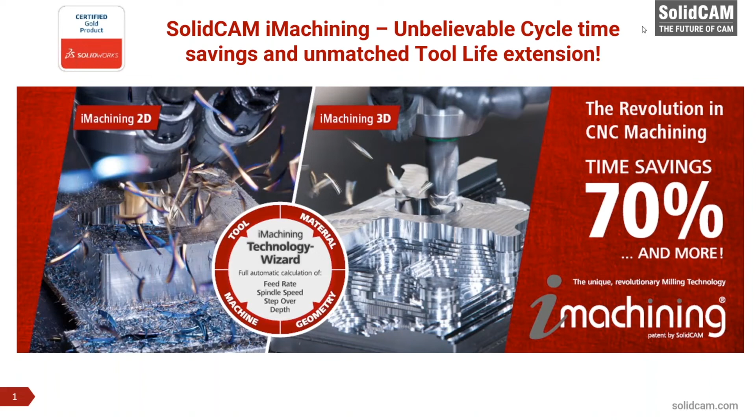I think most of the attendees here are resellers, and I think there are a few customers in here as well. So my goal here is to excite everybody about iMachining, and as Emil said, to show why every SolidCAM customer must be using iMachining. And realistically, every single machine shop should be using iMachining, hands down.

It is by far the single best technological advancement in machining that has existed. And it is the software that will allow you to make more money and cut your parts faster. Outside of buying faster machines, which is huge capital investments, or just adding multiple machines, iMachining is here to save money. It is essentially like adding more CNCs in your machine shop. So, all right, I'm gonna get started and we'll go from there.

So, SolidCAM iMachining, as Emil and I said, it is the revolution in CNC machining, and all of our customers are seeing time savings of 70% or more. And realistically, as you're going to see, this is not just for steel and things like that. Aluminum, it is all of our customers that see these benefits.

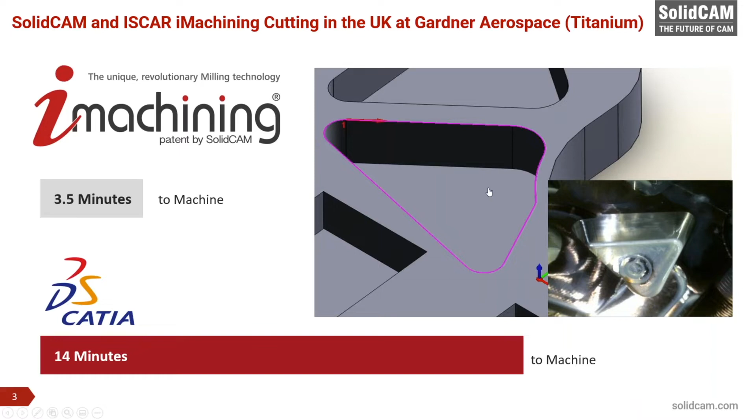Here's some savings in an aluminum part. So this was a customer who produces electronic components. Most aluminum parts are machined out of billet. So this is not a giant part, standard size part. We see it's got like an 8-inch vise in it. They had 400 pieces to produce. The standard cutting time before iMachining was 17 minutes, and the iMachining cutting time afterwards was 6 minutes. So this is a 65% savings.

And this in the end is what really speaks the most. Cutting 400 pieces saved 73 hours on the machine. As I said, we've all been there in machine shops where you need to get the parts cut. iMachining is like having multiple machines cutting the same part, but you get to do it with your machine, and it's just a technology module.

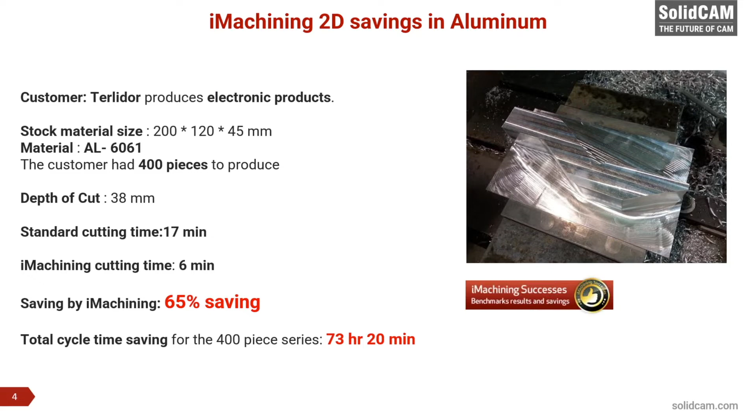Here's another aluminum part. And here, this customer in Germany uses iMachining 2D and 3D. As you see, it's mostly what I would call a prismatic part. There's no really contoured surfaces, but they use a combination of 2D and 3D iMachining. And on all of their parts, they see 65 to 75% savings. So you can see the part down here, you can see the part up here.

So even customers that are machining in aluminum, and I come from an aluminum background myself in aerospace, most people in aluminum think, I cut crazy fast already. I push my machine to the max. I have specific aluminum insert mills and things like that.

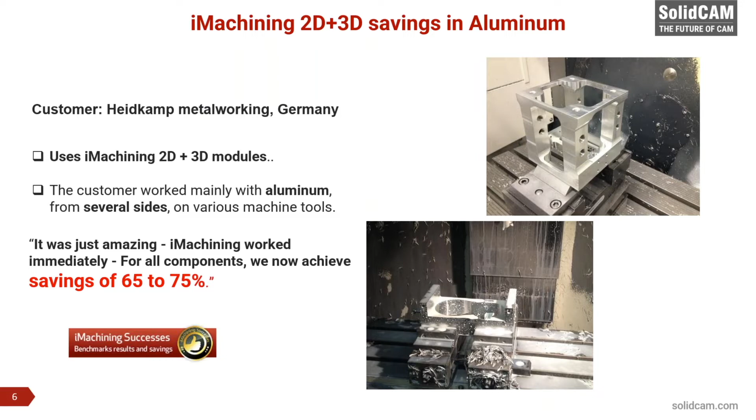Another major aspect of iMachining is reduced wear on the machine. I would say for aluminum customers, this is a pretty big thing, because most aluminum machining is done at high RPMs, and I think a lot of customers are buying high RPM, high dynamic machines because most customers in aluminum feel like they are hitting the limits of their machine all the time. They're generally running the maximum RPM. They feel like they are typing in the maximum feed rates that they can run.

So a lot of aluminum customers buy higher end machines, and higher end machines cost more money, and eventually spindles and stuff do wear out. We've had two machine builders, Hermle and Makino, both test iMachining against other high-speed machining softwares, and they both have concluded that the cutting forces acting on the spindle are the least with iMachining. So this is important, because in the end, spindles cost money.

So if you're a customer that's running your spindles around the clock on aluminum parts, or any other parts, but aluminum is definitely where people are maxing out their spindles on almost every single tool, by lowering the cutting forces and the spiking of loads on the spindle at high RPMs with these 24,000 and above spindles, you will gain more spindle life. And spindles aren't cheap in these machines.

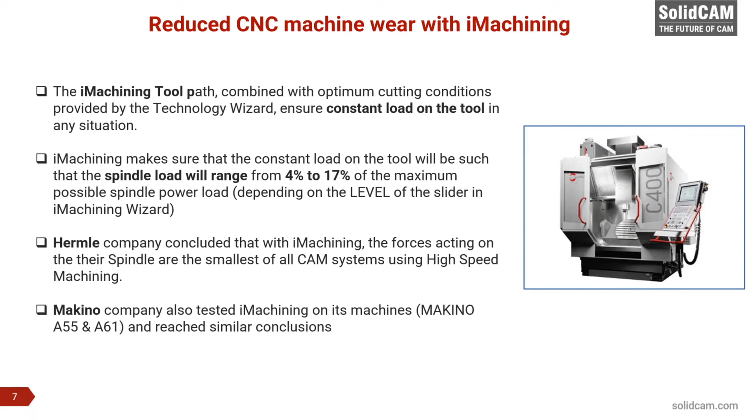So I have an iMachining cutting video here, and I'm going to try something I've not done before, which is sharing a video through GoToWebinar. So I'm going to switch over to that video. Let's see how this works. It's launching up. Now my screen sharing should have stopped, and you should see a new window popped up with a video playing. If you like, you can expand this window. I'm just going to play this video. It's just a 1-minute video that kind of shows what the

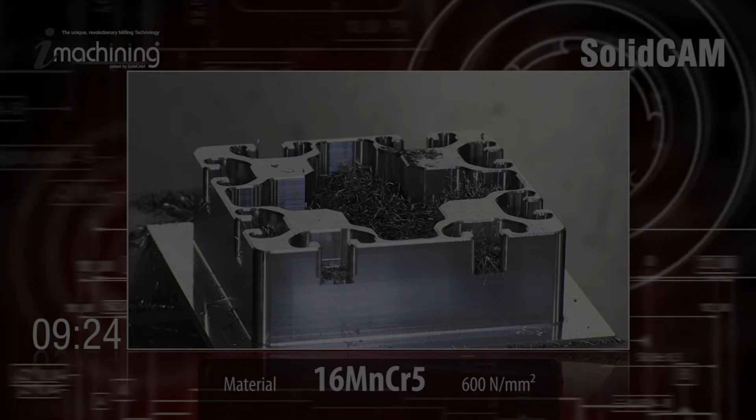Okay, Anthony, go ahead. It's finished. I'm sorry, everybody. Sydney just texted me and let me know that when I switched over to the video, it muted. So hold on 1 second. No, we heard everything, Anthony. Okay, good.

So what did we see in the video? The main thing we wanted to show here was that in iMachining, we do full depth of cuts using almost the full flute length of the tool, and we do high speed machining. As you saw with steel there, we were running, I believe, 14,000 or 16,000 RPMs.

In traditional machining, we generally do shallow depth of cuts and lower surface footages. As I said, in aluminum, most people are running the machines at their limits, but in steel, generally you're going to see people running lower surface footages and lower RPMs. With iMachining, we run higher RPMs and higher depth of cuts.

So to understand how iMachining achieves this, I'm going to talk about what actually happens in the cutting, because this is the portion where I think a lot of customers and all of us machinists, we've all seen videos throughout the past 15, 20 years.

You see these, oh, we have these fantastic material removal rates. You see this specific example of a cut, and the end result is they are able to achieve that on a very specific part and a specific machine, but you do not get that on your part, on your machines. And with iMachining, we give you that cutting, every part on your machines, and this is how we do it.

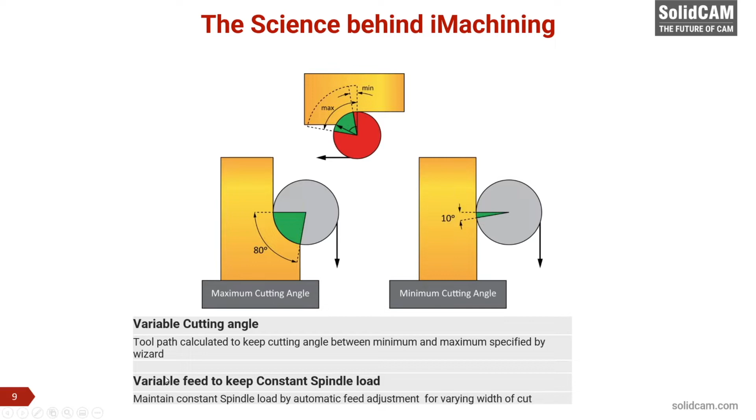So there are two main things here with the iMachining toolpath. We work with a variable cutting angle, which ranges between 80 degrees and 10 degrees. And then we also vary the feed to keep a constant spindle load. And I'm going to get more into that. As you can see here in this example, when the tool engagement is less, where the cutting angle is smaller, we are increasing the feed rate in comparison to when the step over or the engagement of the tool is the max.

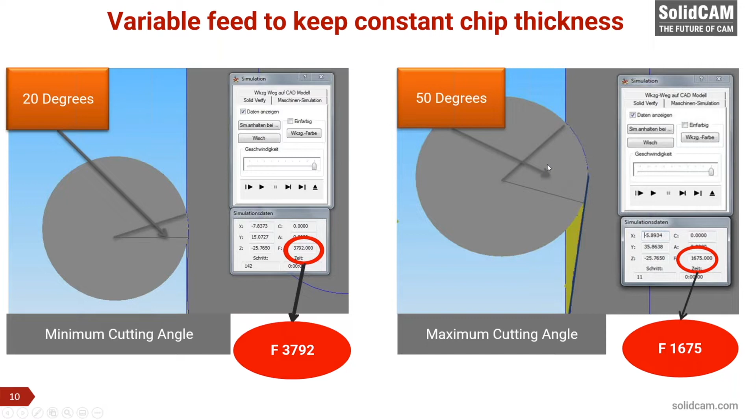Now I have a pretty cool video here that's called plastic deformation and shearing. And once again, I'm going to switch over to, oh, nope, never mind. Sorry, hold on, okay.

Okay, so here I'm sharing this directly through my screen because I want to be able to pause and forward this. So what we are looking at here is, this is not a helical end mill. This is just kind of like a turning insert. So this is the zoomed in video on what is actually happening when material is being cut from a tool. And I'm going to hit play now. And what you're going to see

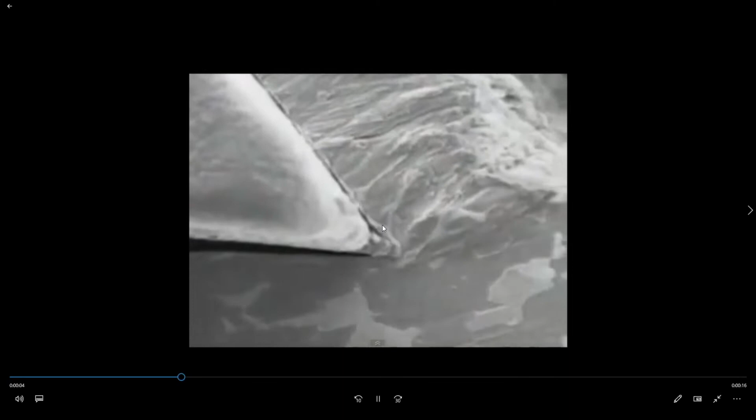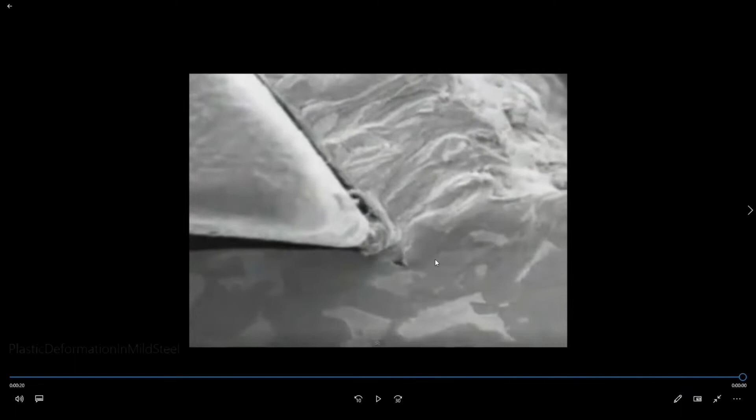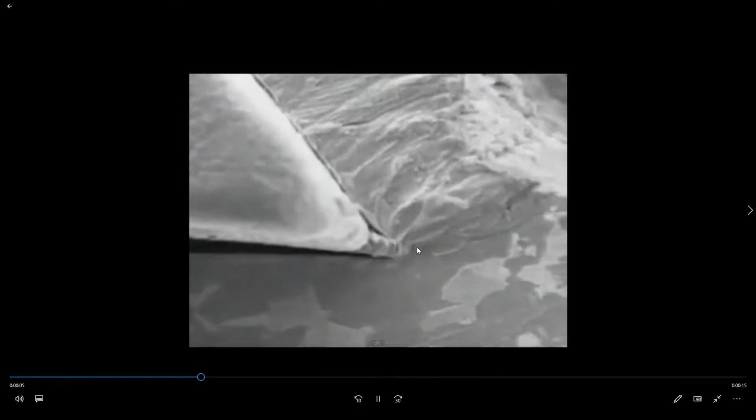is what actually happens is two things. There's something called plastic deformation, which happens around the tip. So this is where the tip of the tool is meeting the material. And you can see that the metal is actually like plasticized. It's going from being solid to shearing off. And then I'm gonna press play again. And what you see is that you get this shearing effect, and the material is sliding up along the insert of the tool.

Now, what I find incredibly interesting about this process is, I'm going to pause it right here. You will see that because you're getting this plastic deformation around the tip here, the goal is that all of the material would perfectly be coming up and away from the tool. But what you do see here is sometimes the material is actually falling underneath of the tool, and then it's rubbing along the backside of the insert.

So what's important here is, and I think everybody has heard this in the machine shop, is getting the tool underneath the material. So when you take a cut, you can't take so soft of a cut that the tool is not able to get underneath of the material and actually shear this. So in aluminum and softer materials, it's obviously less of a problem, right? So the softer the material, the easier it is for the material to plasticize and then shear away. The harder the material, the tougher this gets.

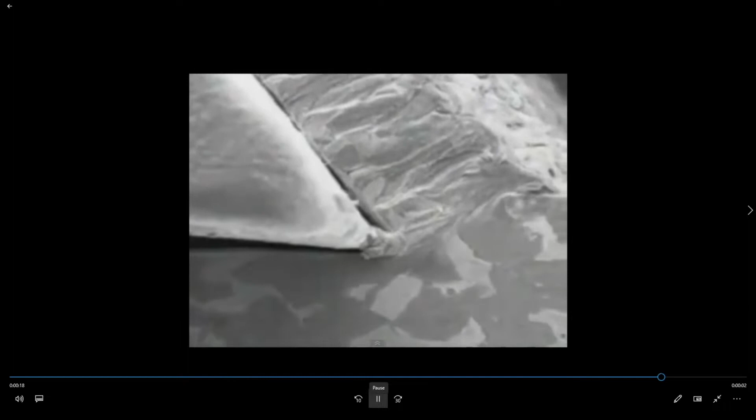Now this actually makes kind of a catch-22 with traditional tool paths, because you need to be cutting fast enough and with a heavy enough cut that the tool is actually getting under the material. But if you cut too much with the hard material, then you're actually going to end up in a situation where you're breaking the tool. So I will switch out of this and go back to the presentation.

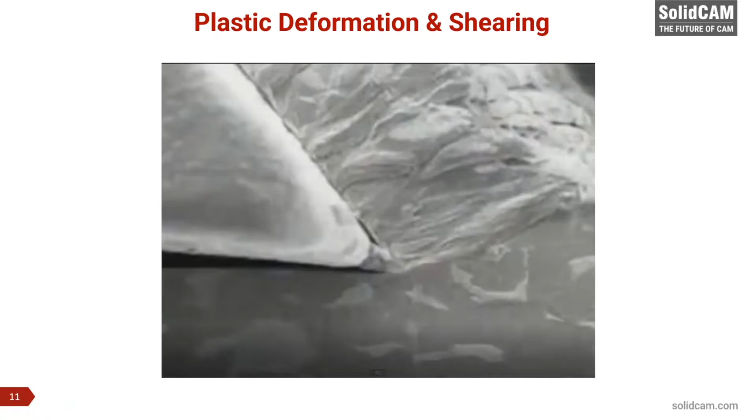Okay, now I have one other animation. Now this is actually going to be an animation of an end mill rotating and cutting. And this goes back to getting the tool underneath of the cut, getting the tool to actually take enough material that the tool is actually going to be able to shear it away without pushing.

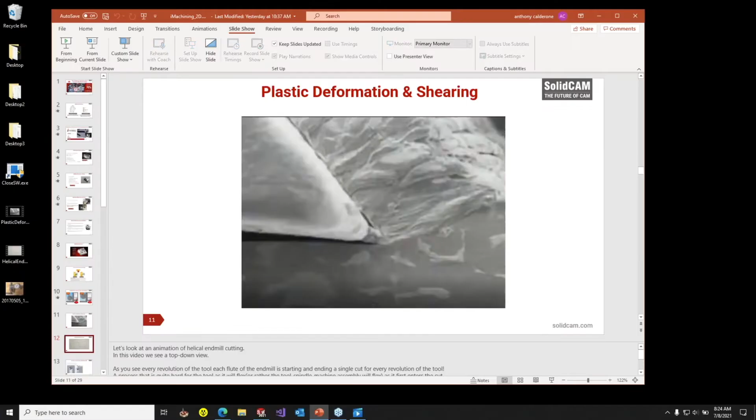Oh, and hold on 1 second. This one I'm going to open up and play frame by frame. All right, hold on 1 second. Enhancements, video settings. Not that one. Playback speed. Okay.

So this animation is actually showing the tool spinning as a helical end mill does, and then the tool is moving in the x-axis and swiping away this material. Now what you see is the tool is actually starting from the thickest amount of material, and as the tool is rotating through the cut, what you're actually going to see is the material is getting less and less and less as you go along. Now I'll go to the next revolution.

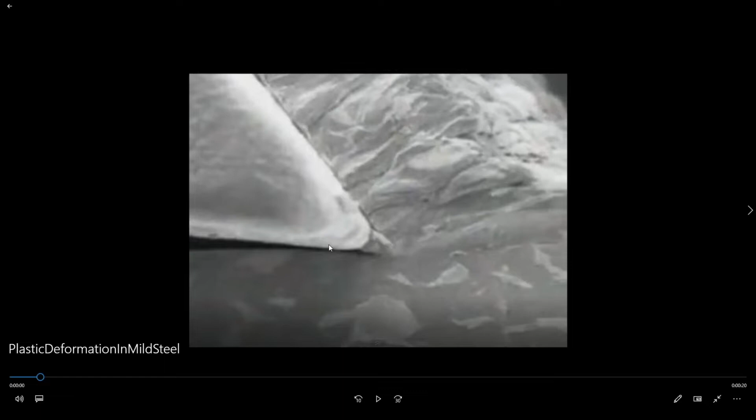So same thing, we're getting thick amount of material. And what you actually see at the end of the cut, the tool actually goes to cutting 0 material. So if we go back and think about the plastic deformation that's happening here, imagine at some point this tool is going to break out of the cut, and you're going to have this plasticized material here. Eventually, there's not enough material to be underneath the cut and for it to shear away, and that chunk of material is going to come back underneath the backside of the insert, where it's actually not cutting.

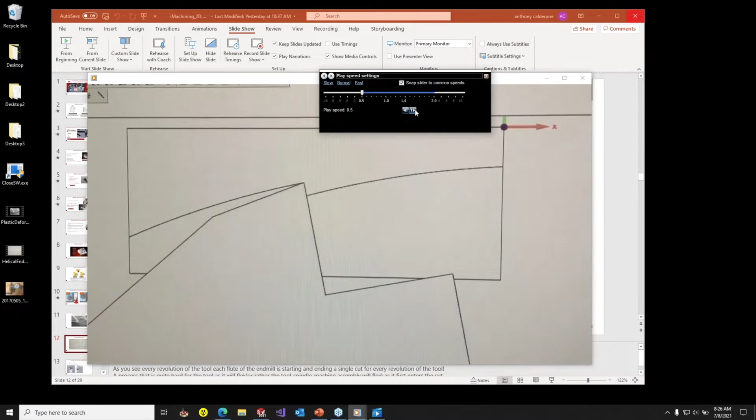So this means every time the tool is actually rotating and it's cutting, each flute is actually entering the material and ending the material where there's no cutting. So right there there's 0 cutting anymore. So every time this tool is doing this back here, there's a changing of the cutting force. So with iMachining, it's really important that we are managing how much of the tool is cutting.

And what we want to do is we always want to go what we call thick to thin. In the next slide, I'm going to explain a little bit more about this thick to thin. We always want the tool starting cutting the most amount of material and then going to the thinnest amount of material. Okay, so we've seen those 2 animations. So now let's talk a little bit about what I said was thick to thin.

So if we take this example of this tool, if we were doing a full slot, what actually happens is at this point here where the flute is first entering the material, you're actually starting with 0 chip thickness. There is 0 amount of material that the tool is touching. So it's actually taking, depending upon the tool, the sharpness, the material, and everything, some distance before the flute rotates to where the tool is taking enough material where that plastic deformation and shearing is actually happening.

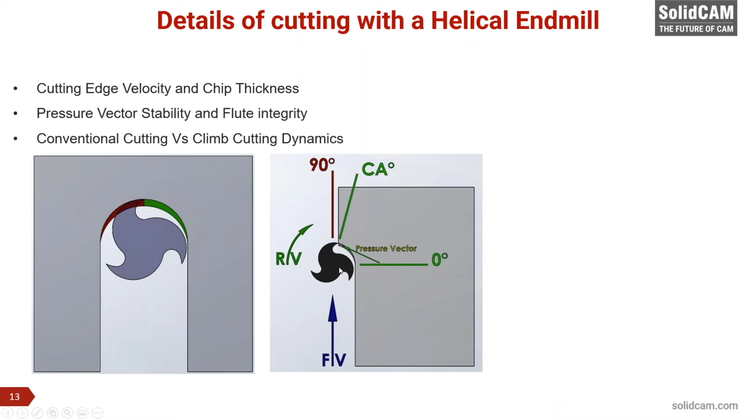Chip thickness and chip load, are they the same? As we all know, if you go into the machinist handbook or you even look in a catalog, chip load is generally what we see. We now see some manufacturers are actually putting chip thickness in there. So what's the difference between chip load and chip thickness? Chip load is actually the thickness of the cut of the chip if we're cutting exactly at 90 degrees. Now at 90 degrees, chip thickness and chip load are equal.

When you cut less than 90 degrees, chip thickness and chip load are not the same. So remember, as I said, the tool is always going from the thickest part of the chip to the thinnest part of the chip at the very end. So as you can imagine, if we are only ever cutting in this small section, let's say only 30 degrees of the tool is cutting, you're never actually cutting the chip load that you want. And the end mill is made to take that chip load. We need to take a certain amount of cut to get the tool underneath the material, so that way we can actually shear it off.

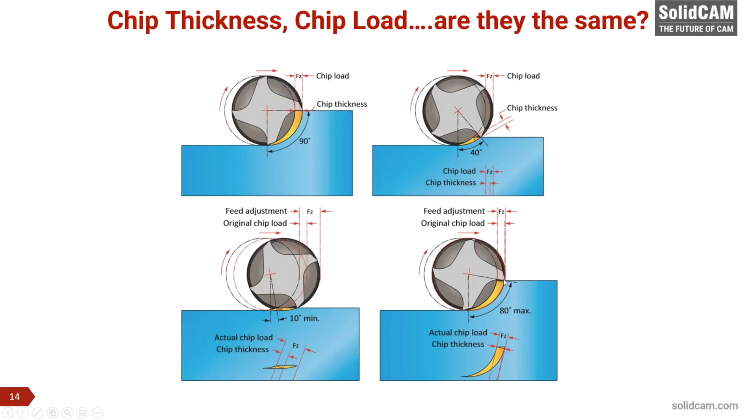Another major portion of trying to adjust for chip load and chip thickness is adjusting the feed rate based on the center of the tool versus the edge of the tool. So the CNC is commanded based on the center of the tool, but the tool is actually moving based on the edge. And I like to use the example of runners on a racetrack. So like when we see runners lined up on a racetrack, the inside person is actually staggered behind because it's the shortest distance. So we have the same thing here that happens with end mills.

So what iMachining is doing is every time we see an arc, or even just successive points that make an arc, we are adjusting the feed rate such that the feed at the edge of the tool is giving us our correct chip thickness. It's kind of a crazy thing to think about, that iMachining is doing both of those feed rate corrections. We are adjusting the feed rate for the engagement angle to get the proper chip thickness. But for arcs or any toolpath or any successive curves of points that emulate an arc, we also need to increase or decrease the feed rate based on the edge of the cutter.

So this means for internal corners, we actually slow down the feed rate so the chip thickness will be proper at the edge of the cutter. And when we do external corners, we increase the feed rate.

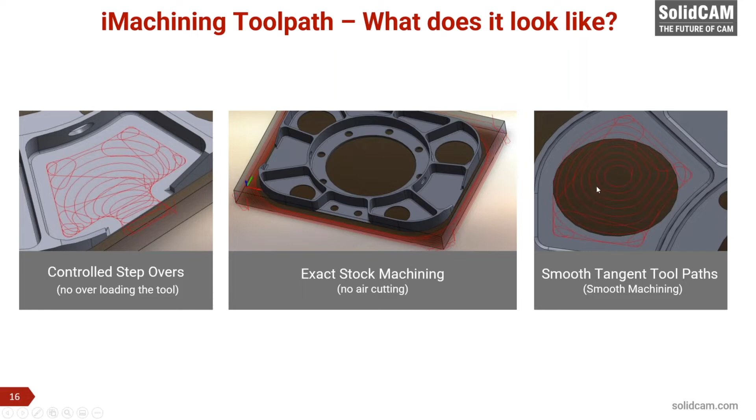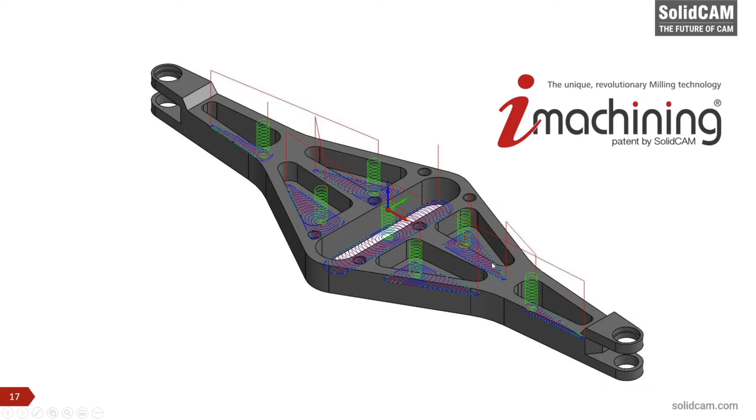Here's a simple bracket just to show a couple examples of what it will look like. As I said, for closed pockets, you're generally going to see helical entry, unless we use pre-drilling or something. And you're always going to see a morphing spiral, and you're going to see it blends out to the shape of the pocket. But what you'll notice is iMachining with all of these shapes, they all start with a spiral, no matter what the pocket looks like. And then the tool forms the shape of the pocket after the spiral ends.

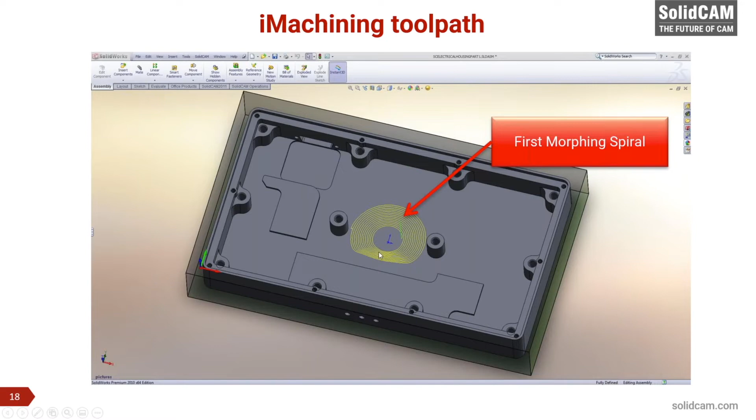So as I said, we will always start from a morphing spiral. And morphing spiral is important because, as I said, we want to keep the tool in contact all the time. So if we look down here, you're going to see that the passes are more tightly grouped together, and then you see the thickest or a wider spacing between these toolpaths. So instead of the tool repositioning all the time, we try to maximize morphing spirals.

Once we hit an island, we do something called separation or moating, where we cut around the islands and we get those areas cleared out. Once islands are cleared out, then we return back to morphing spirals. So this is kind of the general goal of the toolpath.

Spirals conquer islands, as you see here. So here we have a moat. So moat, just like the water around a castle. And then we go back to morphing spirals. And these are unique to iMachining. Only iMachining has morphing spirals and channels to separate regions.

Now, as I said, the iMachining module is made up of two things: the toolpath and then the technology wizard. So you can have the best toolpath in the world, but in the end, for some given material and tool, we need to know what are the cutting parameters to drive it. So this falls back on us, the CNC CAM programmers. And what we see is that we have basically a pretty big problem.

We have a lot of data that we need to take care of. We have the material, which is cutting speed, the hardness, the min and max step. We have the tool, which has a length, number of flutes, the helix angle, the chip thickness, the hardness. We have the geometry, which is the depth, and then we have the machine. What's the maximum spindle speed, the feed rate, the power of the spindle, and what's the memory size. So all these things are parameters that we have to take care of to figure out what is the proper feed and speed and cutting parameters.

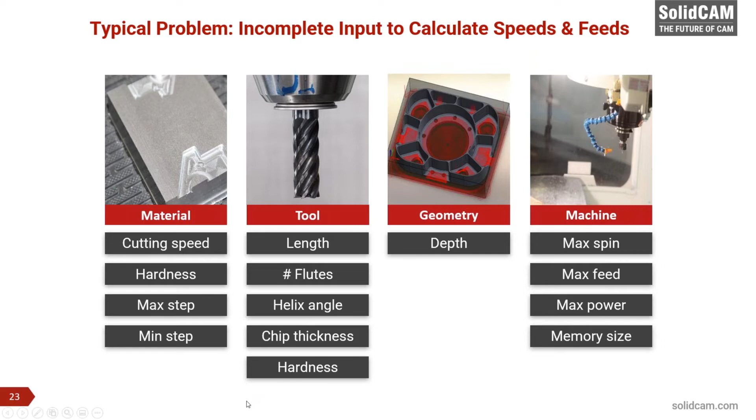The technology wizard solves this entirely in that it takes out all that guesswork and trial and error, and it wraps everything up into one. So what this means is that we actually take in the material, the geometry, the tool, and the machine, and then what we give is depth, feed rate, step overs, and spindle speeds. And all of these things are perfectly synchronized to each other, and this is important.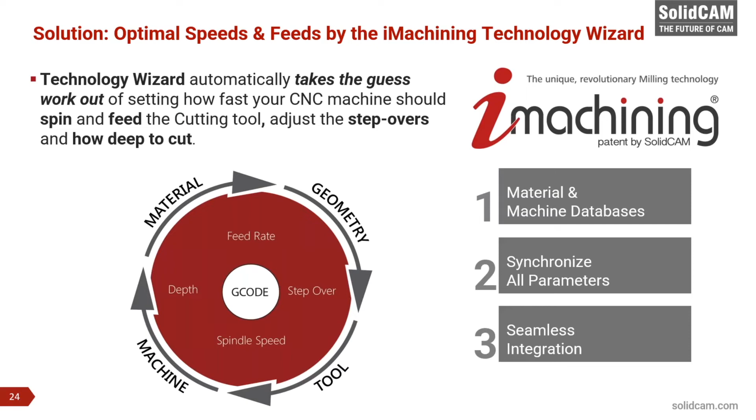So this means when we do all of our feed rate adjustments for a specific machine, if your machine can't hit a specific feed rate, well, then we need to adjust other parameters. So you can't just straight up say, hey, I'm gonna cut everything at the maximum spindle speed, and then I'm gonna run this chip thickness. Well, you might have such a big tool that you will run too fast for the machine to actually run the feed rate. So if that happens, you need to recalculate either your spindle speed, your depth or width of cuts, your chip thickness, something. The iMachining wizard takes care of all of this.

And the most unique thing about the iMachining wizard is we have a machining level slider. In the end, we can't know and feel all of the particularities that are going on in the CNC. We don't know how strongly a part is being held. We don't know what the fixturing is like. There are things that we can't know that require human intelligence. This is why CAM automation and automatic programming of parts from a 2D drawing doesn't work. We still need our machinist background to be able to look at something and say, okay, I can run faster or I can run slower.

So what we have is the iMachining slider. This goes from level 1 to level 8. Basically level 8 is the most aggressive, level 1 being the least aggressive, and then we have interpolated steps in between. Most of our customers are cutting with level 6. You can jump right out of the software, run level 6, and you're good.

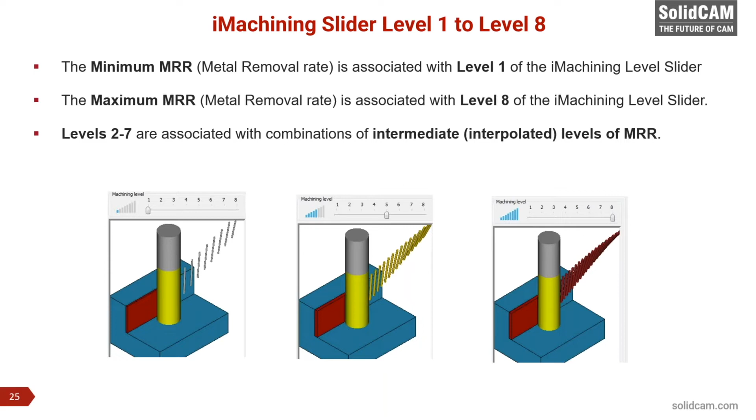But if you got a really long tool and a really long holder, like an extended holder, and you got some vibration problems because it's obviously extra long, you can lower the machining level. Or if you got a really good tool, if you got this thing held in a shrink fit holder, you can go faster. You can run towards machining level 8. And so this is the machining technology wizard calculating all of these sets of data, and then you as the programmer sliding one way or the other, using your intelligence based on what's happening at the CNC.

The other thing we have is axial contact points, and this is a pretty big thing because this is kind of what gives us stability. This really is what gives us stability with deep cutting, and why deep cutting works so much better than shallow depth of cuts. So in this example, I love to talk about insert cutters with face milling.

So when we have a big face mill and we cut across steel, every time the tool starts to enter in material, you hear the dunk, dunk, dunk, dunk, dunk of the spindle and the tool entering in the material. And once the tool actually gets fully into the cut, you hear the spindle and all that clunking, it goes away. And I don't have a picture here, but I probably should because it would be great to show, but I think everybody knows it.

When you look at the top of your part after a face mill runs across it, you see the swirl marks in the material are different at the beginning of the cut where the tool is trying to enter, and then after the tool enters, you have this smooth cut, and then at the end of the cut, when it exits again, you hear that dunk, dunk, dunk.

So what happens is every time a flute is engaging and disengaging, remember I have my video with the plastic deformation, the spindle is flexing. Once you get more than 2 flutes in the material with a face mill, it smooths out the load and you're not getting that flexing anymore. Well, that same behavior happens with helical end mills.

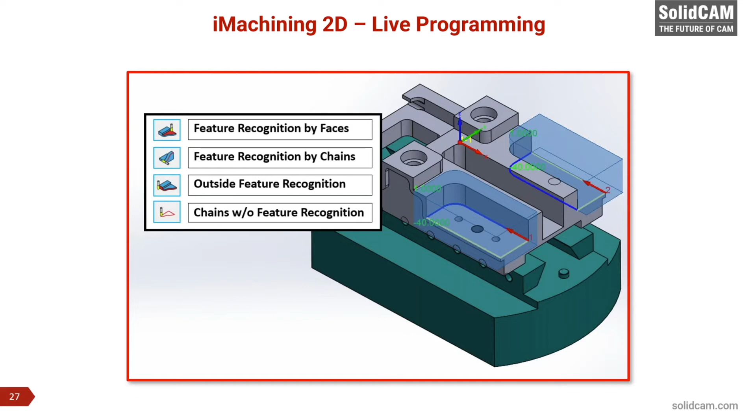Okay, so let's get into some 2D iMachining programming real quick. In the end, my thing is about teaching us about the machining and what's going on, so that way we can appreciate when we actually do this iMachining 2D, why all our customers save money. Okay, now the presentation portion of this for the live demo is actually pretty small. So I'm only going to put a couple tool paths down and talk about iMachining 2D and what we do.

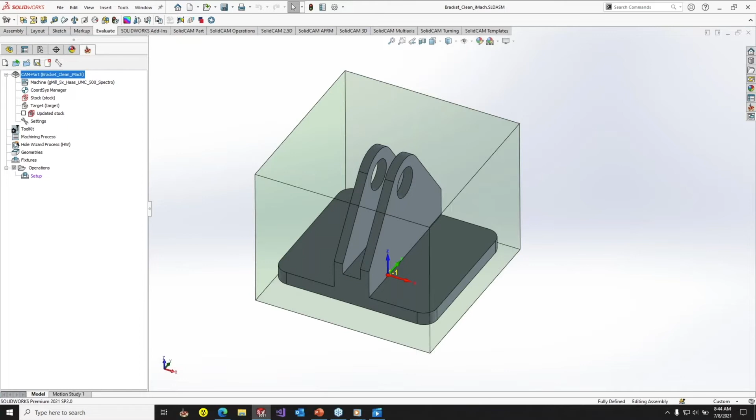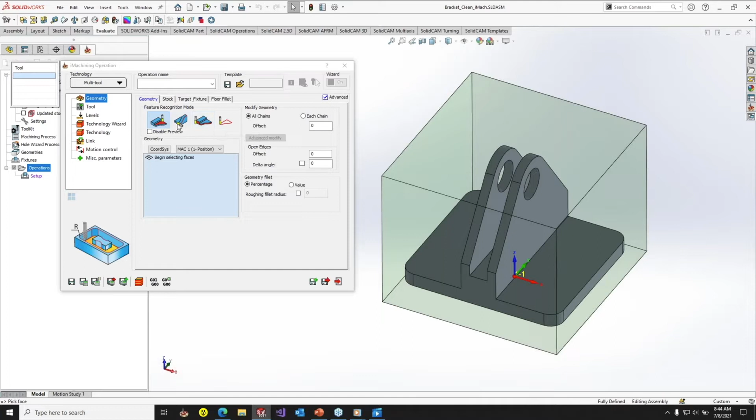So I have this part here. I am going to add a 2D iMachining operation. I'm going to be using all of our feature recognition mode stuff. So everybody who is familiar with iMachining will know that the feature recognition is something new that we came out with in the past couple years. And what this is, we're able to just select simple features that we want to machine, and we automatically recognize the full machinable feature based on the tool, the stock, and everything.

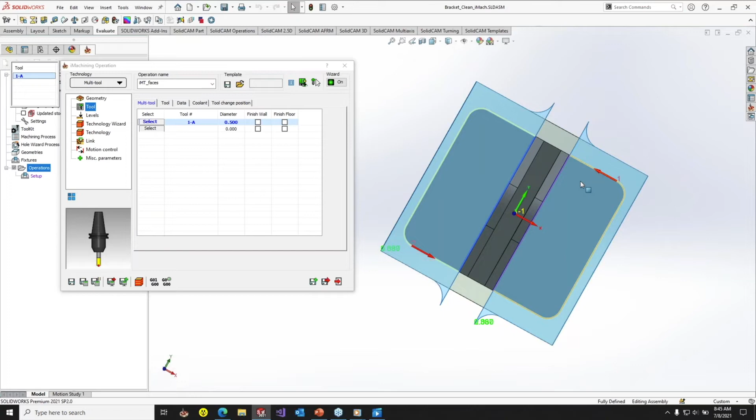So I picked those two faces. I'm going to go select my end mill. And here we get a preview of what the machinable feature is. So what we see here is that even though I picked this face, the machinable feature knows that there's stock around this hole outside and we need to cut it. And we need to extend and come off of this wall. So normally we would have to create like a sketch or some type of geometry that we could pick. With the machinable feature, it does it automatically.

The only thing I have to do is I say I just want to finish the wall. In my technology wizard, here we have our slider that we talked about, so we can go from 1 to 8. If I go to a top-down view and zoom in here you can see how the engagement angle or cutting angle is actually changing between level 6 and going down to level 1. So it gives you kind of a dynamic feedback, so we can see this before actually having to go out to the machine.

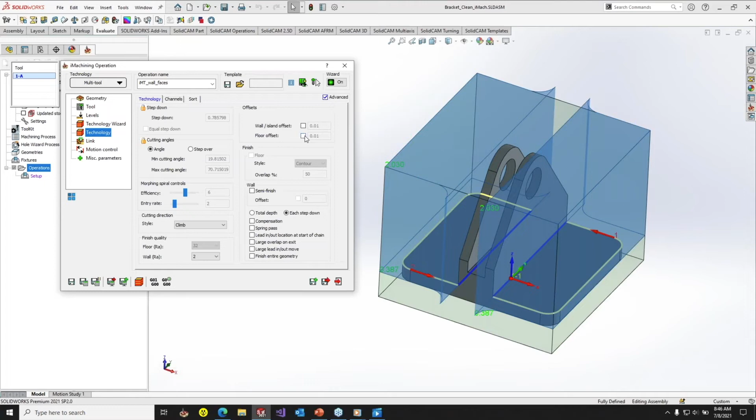And the only thing I need to do is I'm going to set my floor offset to 0. I will calculate my tool path. There's my tool path. I can disable my preview so I can kind of see what we get. So here you can see we have 2 depth of cuts. I will launch the simulation. I'm going to play the simulation in the external window just to make it a little bit less busy. So let's play. So as we see with iMachining, as I said, it's a controlled step over and it's working from the stock to the shape that you're cutting.

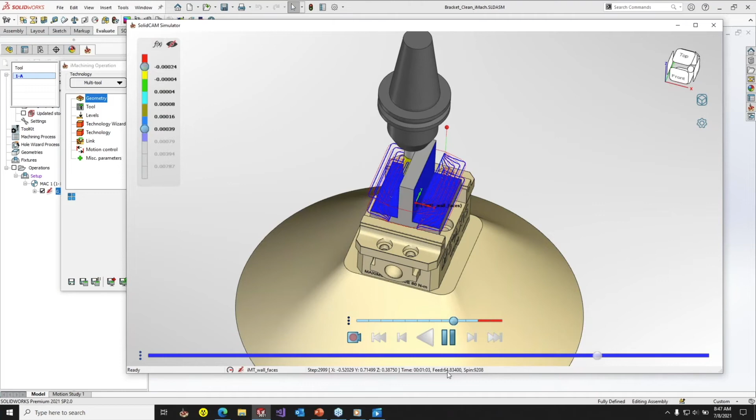And if we see down here, you can see the feed rate is constantly changing all the time. So every time the tool is entering and exiting the material, the feed rate is being adjusted for the chip thickness. And based on any internal or external corners, we are adjusting the feed rate based on the edge of the cutter compared to the center of the cutter.

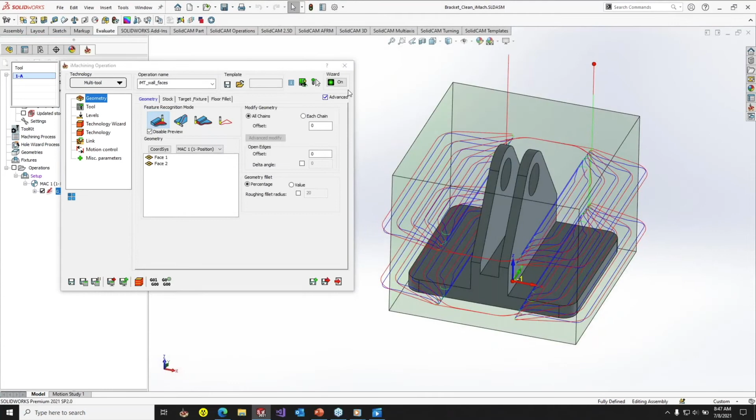So here's a tool path. I can turn on the stock and target comparison. Okay, so we can see here that basically what we did is we finished the wall and we finished the floor. Most of the time now, I would copy and paste operations, but with iMachining's feature recognition, it's so easy to make toolpath from scratch. So I'm just going to make a new iMachining operation.

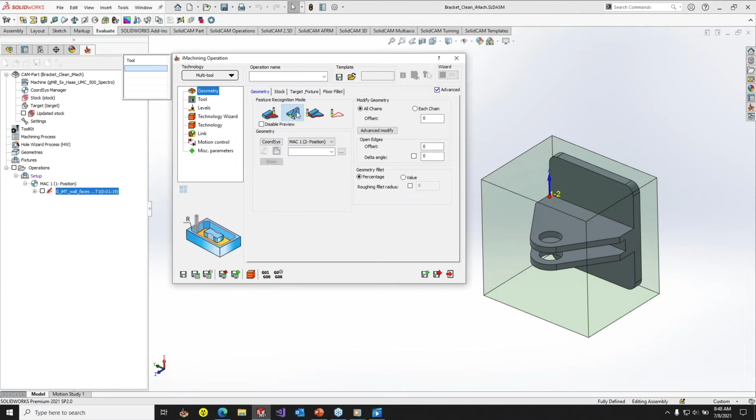And it's going to run the same feature recognition as it did for the floors. You can see the updated stock is being calculated because every operation in the feature recognition is based off of the previous cuts. I'm going to finish the wall again. The only thing I need to do is pick my machining depth. So my machining depth was the default of the chain. If I would have picked the chain at the bottom, it would have defaulted to there.

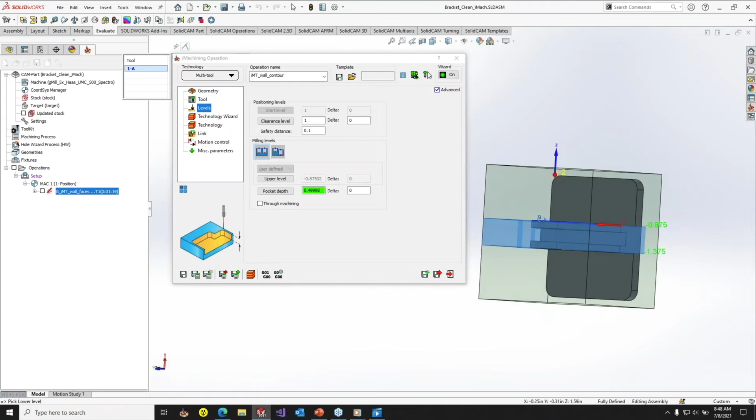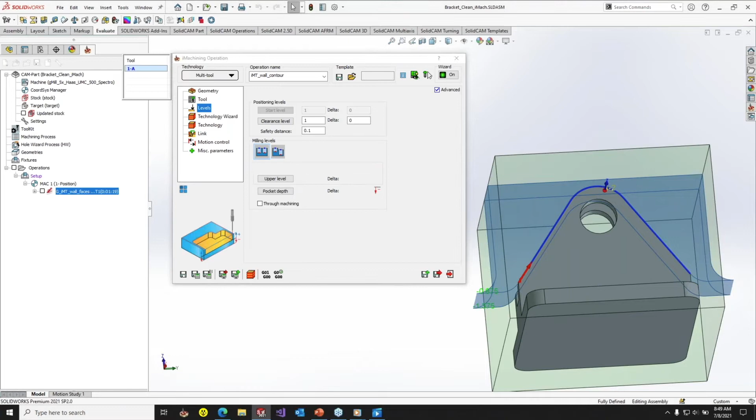So here we see I picked the bottom, and let's go to a top-down view, and we will see the same thing that we saw before, which is even though I only picked these 3 lines, it made a complete region for me to machine, which we came off tangentially with an arc. We have this whole region that we need to cut because that's where the stock is. I'm just gonna put a small delta Z to go past the bottom.

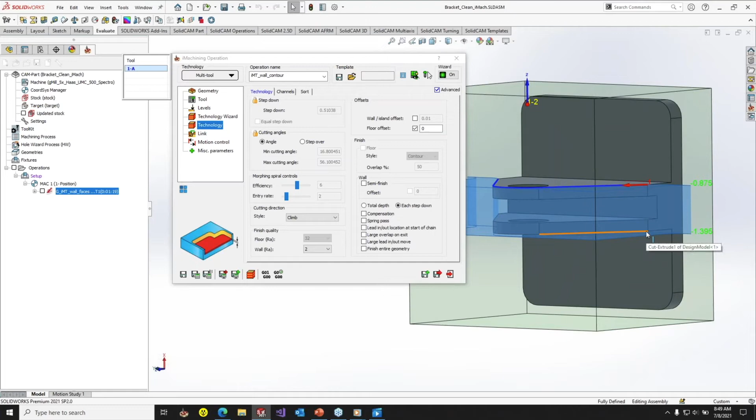Once again, SolidCAM and iMachining is requiring that there is a programmer who knows what he wants to do. So as a machinist, I know when I cut this face, I want to bring the tool a little bit beyond the bottom because I don't want to bring the tip of the cutter right to the edge of the bottom surface. I want to extend it past. So you're still driving the software. You need to make those smart decisions.

I'll calculate this tool path. So here we get our tool path. As I said, the technology wizard knows about the flute length, the depth of cut, and everything. So here we get one depth of cut. It did it automatically. In the previous operation, we didn't have enough flute length, so it automatically calculated 2 depth of cuts. I will switch back. I'll switch to the simulation just to see what we got.

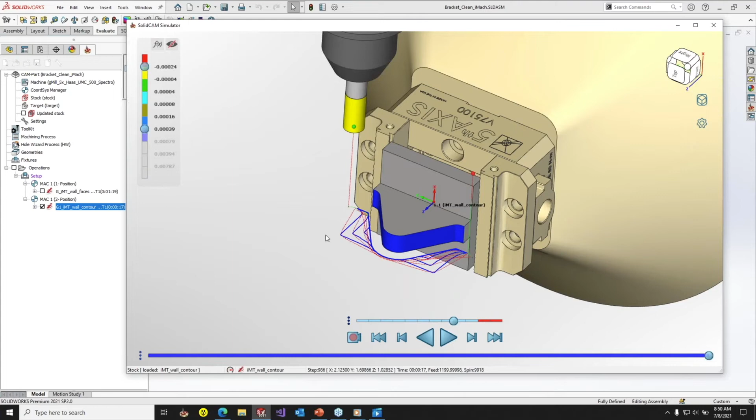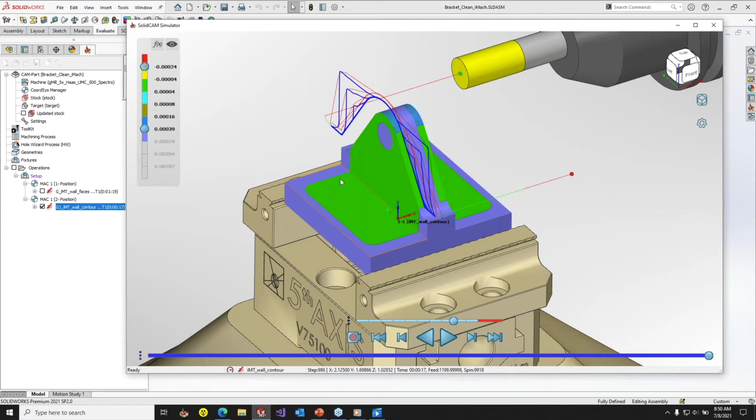As we saw from the previous cut, stock-based machining. So what we see is the tool path is working from the stock and then machining away the material. If I turn on the stock and target comparison, we can see that we did a good job. We finished the line, we finished the arc, we got these faces. So now we got a couple different areas we could go to. We need to machine the slot, the hole. I'm not going to go through everything. I'm going to show cutting the outside of the part because there's some cool things I want to show there.

So let's say we now want to machine around the outside of the part. Once again, I'm going to make a 2D operation from scratch. I'm not copying and pasting because this really shows how easy it is to make new operations. We're going to switch back to the top MAC position. We have a third feature recognition that's called outside. Almost every single part, we find that customers machine the outside of the part. So we have a dedicated feature recognition mode that's called just outside.

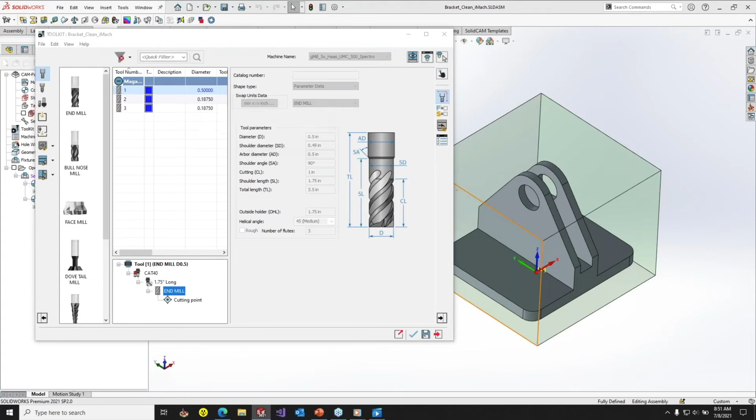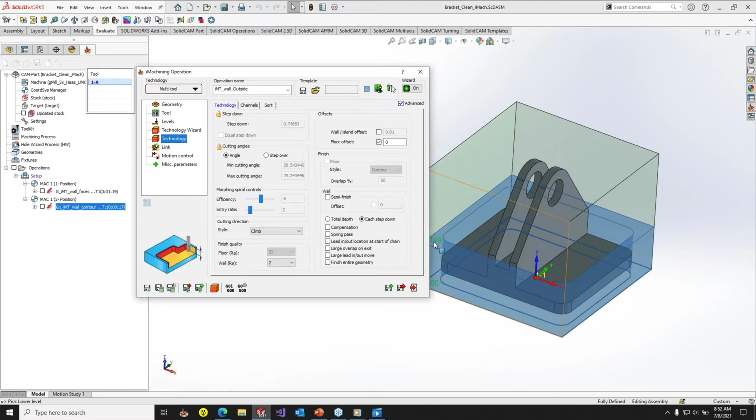And all we got to do is we're going to go pick the 1/2" end mill. And let's see, we got the depth there. We want to finish the wall. I will go and set my floor offset to 0 because there is actually no material we have to worry about there. And let's save and calculate this tool path.

Now, what we see is we only get tool path over on the ends. And everybody's probably wondering, why is that? Well, our fixture's in the way.

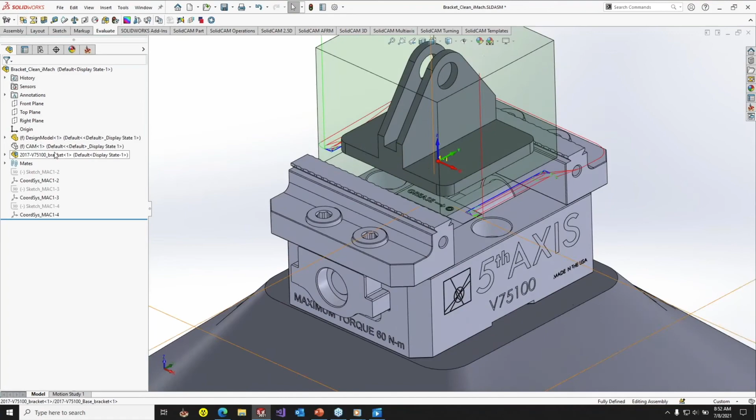So if I turn on the fixture in SolidWorks, we can see here that this fixture is in the way of what we're trying to cut. And why is it in the way? Because I said I wanted to machine all the way down to the tip of the stock. And this could be what I wanted to do, but I want to machine around the entire part. So realistically, I only need to machine down from this face and go a little bit beyond.

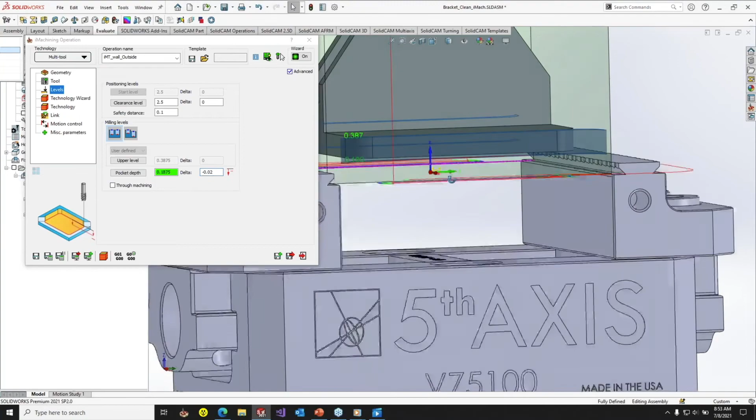So what we're going to do is we're going to open up that operation. I'm going to change my pocket depth to be there. And I'm going to say, once again, I want to go like 20 thou past. Now, when we see the geometry preview, we're still seeing that the tool is not going all the way around.

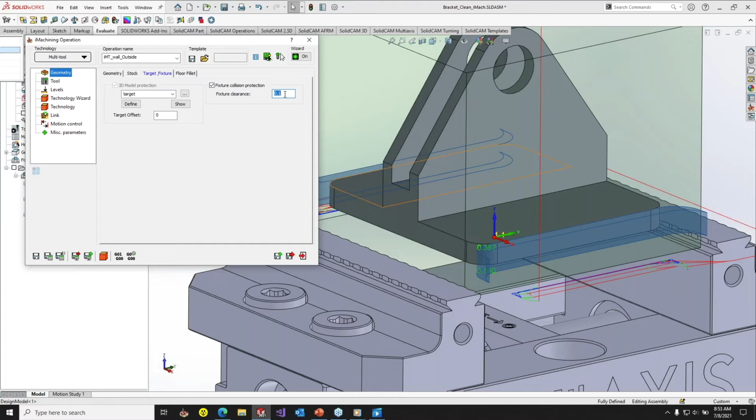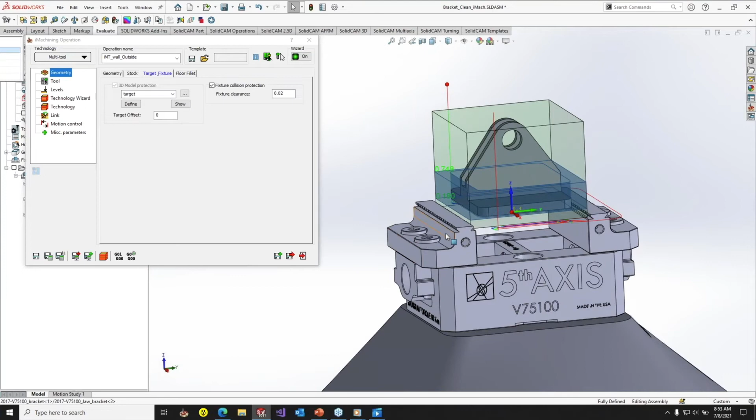Well, that is because in the fixture protection, we have 0.1, which in millimeters is like 3 or 4 millimeters, I believe. So there is a fixture collision protection of 3 millimeters. So this means it's actually protecting the tool based on the fixture over here. The nice part here is I know I got an accurate fixture. This is a 5-axis fixture, and the point of generally these 5-axis fixtures is to know good clearance around everything. So here, I know I can put like a 20 thou clearance distance, basically 0.5 millimeter.

Now we calculate our tool path. Now we get the tool path all the way around the stock. As you can see, the upper level was also automatically calculated where the previous operation stopped machining. So I didn't have to figure out any of that stuff.

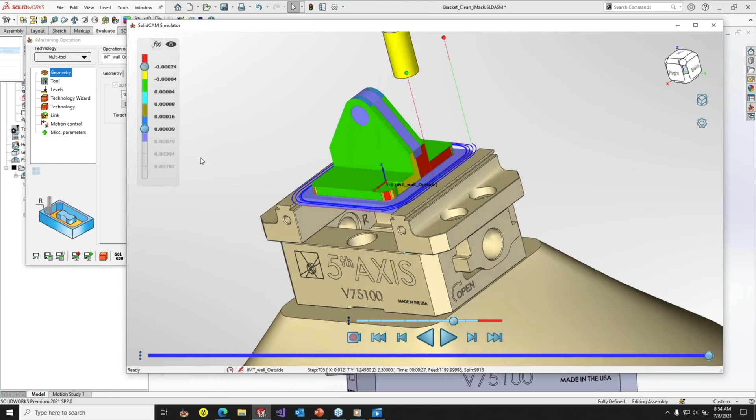We'll go to the simulation. Turn off the stock and target comparison and play it. And then here is our machining around the outside. And you can see this is just in the tolerancing of the cuts. That's less than 2 tenths. So I have some pretty tight tolerances in here for the updated stock.

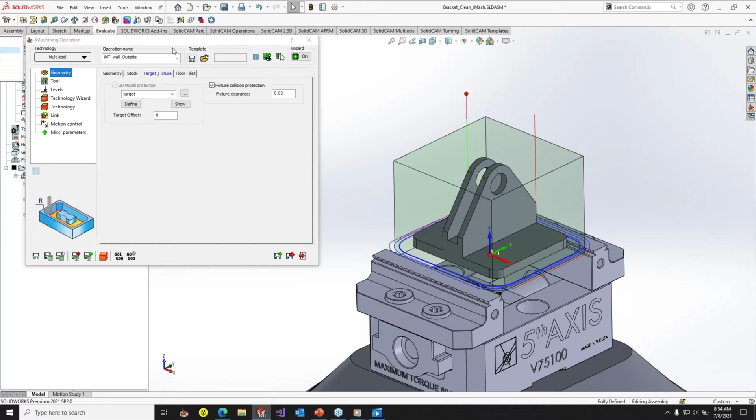So as you can see with iMachining 2D, iMachining 2D is basically doing what we call prismatic features. They are planar floors and walls. They can be tapered, but they're not contour surfaces. iMachining 2D is doing a combination of roughing. It can be doing rest roughing and finishing inside of one operation. So you can define whether you're finishing walls and floors.

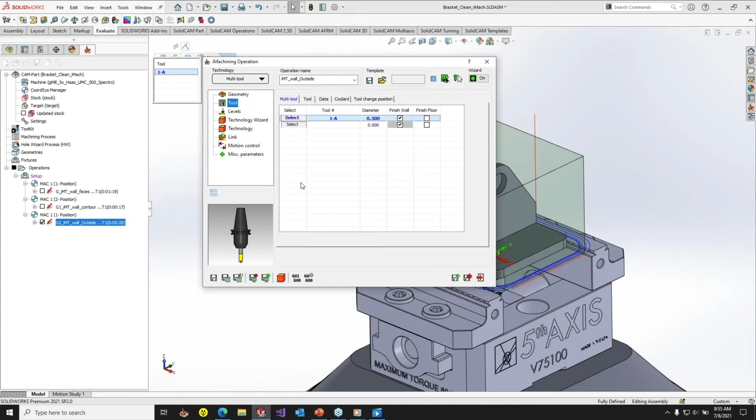It is a multi-tool operation, which I didn't show here, but I think any customers in SolidCAM are familiar with multi-tool. So you can define multiple tools to do separate finishing or to do separate rest roughing. And all of this is managed from the 2D iMachining toolpath. Go back to the presentation. Okay.

Now I have kind of a challenge that I thought of, because from my side, as Emil said in the beginning, every customer of ours who cuts with iMachining would never give it up. It's almost like a magical experience the first time you cut with iMachining, because you're like, wow, I didn't know that my machine could remove material that way. To be honest, it removes material so fast that some of our customers have problems with the chip conveyors in their machines getting all the chips out of the machine. It seems crazy, but this is a problem that actually happens.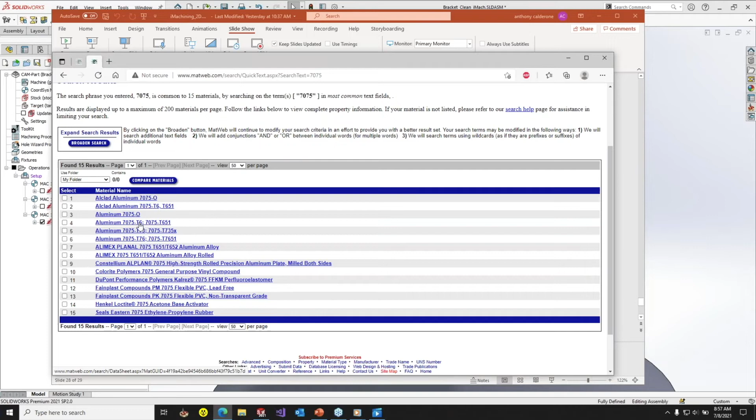And what you do is up here in the top, you just need to type what material you got. So I'm just going to type in 7075 just for instance. It gives you a list of materials. This website has everything in it. You can go to, let's say, 7075 T6. And the only thing we need is the ultimate tensile strength. So for English units, this is 83,000 PSI, and for metric, it's 572 megapascals.

So you are going to find your block of material, go on Matweb, get the ultimate tensile strength. This is going to be used to create an iMachining database. I'll show you in a minute. Find a new 3 or 5 flute solid carbide end mill in your shop. Get something in the 6 to 10 millimeter range.

I say this because the larger tools you go, the stronger your machine has to be, the fixturing has to be. So the last thing you want to do is not hold on to something tight enough and then have your part fly out of your vise. So 6 to 10 millimeters, that's like 1/4 inch to 3/8 end mill. It's a nice size to start. Then you want to use a caliper, so you can measure 1 or 2 axial contact points. So this is that depth here.

Model a simple rectangular open pocket as you see down here. You can go with these standard parameters, but it doesn't really matter. You can make the width like 6 times the diameter, the length to be 4 times the diameter, and make the depth either 1 or 2 ACPs, depending upon how much flute length you got. Program a simple iMachining 2D pocket using level 6.

If you don't have iMachining today, call up your reseller, ask for just a trial license of it. You just want to make simple 2D iMachining. You saw how simple it was. Pick level 6, go cut it on your CNC. You're going to be amazed.

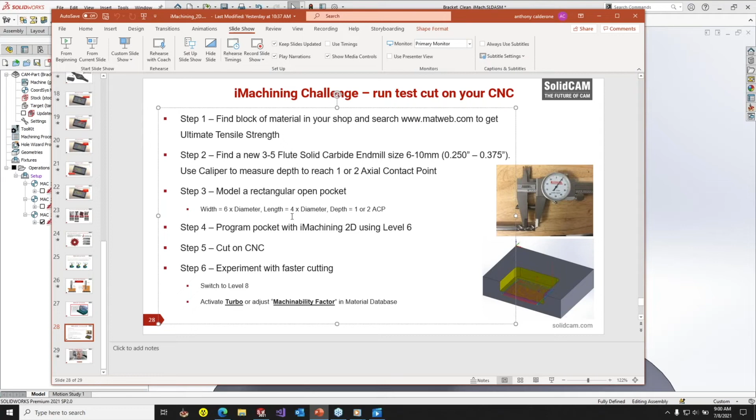All right, now I'm going to show real quick what we need to do. So you go to Matweb, you find your block of material, you find your ultimate tensile strength, it's 572. Let's just close this part. So you need to go to the iMachining database. If you know it's an aluminum, you're just going to right click, say new material. In the new material, you can see here I have 7075 T6. All you need to do is type in the ultimate tensile strength right here.

So if I were to say new material here, you can see the only thing we need to do is type in the ultimate tensile strength. I'm in inches at the moment, so it would be 83,000, and that would be the ultimate tensile strength. That's all you need to do for the material.

And then if you're not set up with machines, what you can do is underneath of machine database where it says defined by VMID, make a new machine and you can just call it global. And if it's underneath of this defined by VMID, we automatically take the spindle speeds and feed rates directly from the VMID. Generally, these are going to be the maximums of your machine.

So like if you have a 24,000 RPM spindle, the maximum spindle speed is going to be 24,000 RPMs. And if your maximum feed rate is 2 meters a minute, you're going to have that in there. Now, what we find is not every customer wants to be machining all the time at the maximum of their machine.

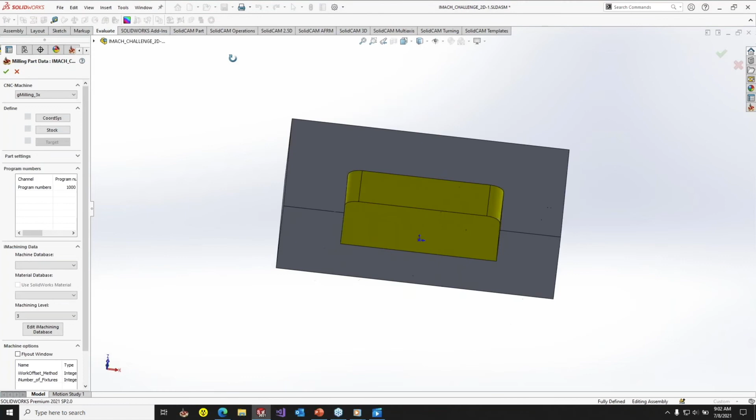So we're going to go grab my Haas SS. Let's go put down a coordinate system real quick. Obviously, you need to put your coordinate system where you're going to pick up your part.

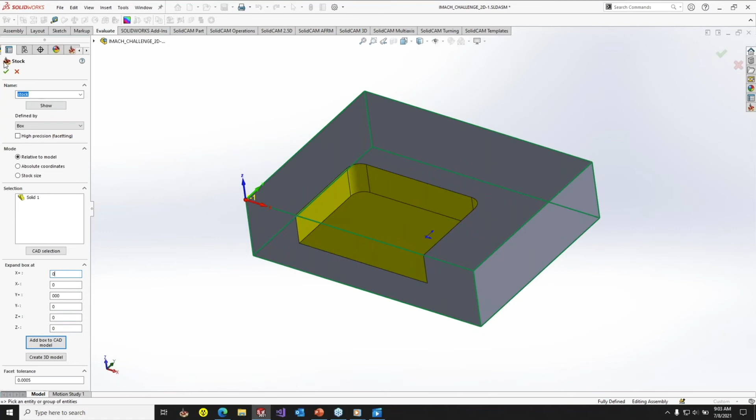So for the stock, in this example, we're starting with a machine block that is the same size. So you can put zeros in all of your boxes. This way you get a stock that's exactly that size. An important thing to note: make sure your stock is actually the proper size.

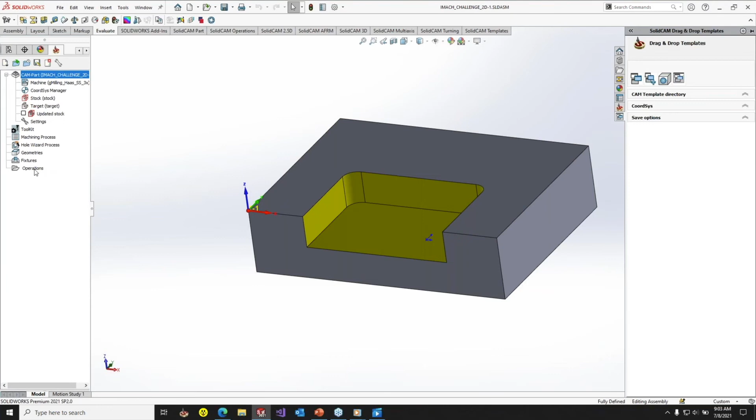So in your machine database, as I said, you should have a global one. So make a global machine, and we can pick our 7075. I can pick level 6 because that's what I said to do. Really simple, 2D iMachining. Use feature recognition by faces. All you've got to do is pick on that face.

I will make my tool. So in this case, 375. Make sure you know your helical angle, so you enter it there. We've modeled that you measured with a caliper what the axial contact point is, so we'll just pick 4 flutes. There's our feature. You don't have to worry about finishing the walls and the floors. If you like, you can set the floor offset to 0, and then calculate toolpath.

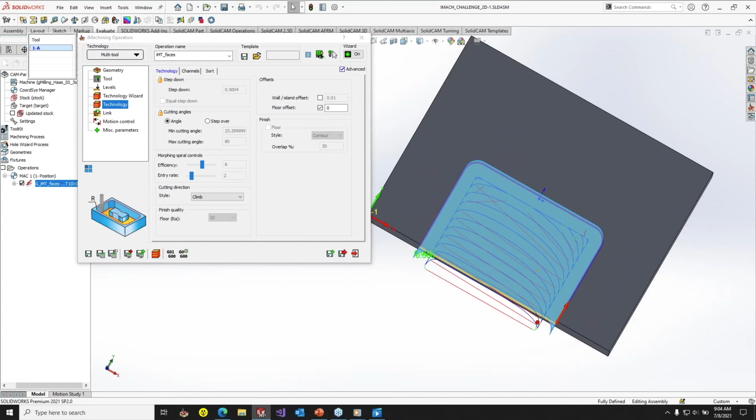That's simple. Go take this out to the machine and run the test cut. The other nice thing with cutting with smaller tools is you're going to have a little less feed rate than with the larger tools. When you start cutting with a big tool and you start cutting fast, the feed rates are, I'm not going to say scary, but if you're not used to cutting that fast, it's a little shocking. With the smaller tools, you're not running anything super crazy where the machine's moving around so fast you can't even see what it's doing.

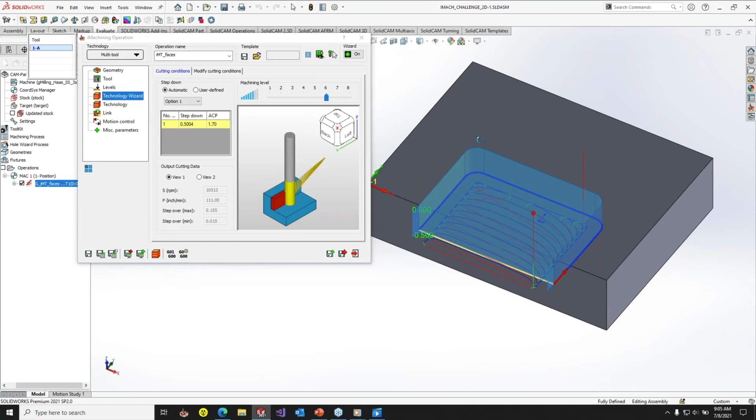So G-code this and then run it. And then if it works, great, and you're like, man, I want to see how far my machine can go, you can change the slider position up to level 8. In this modify cutting conditions page, as I said, you can activate turbo mode. Turbo mode will basically run higher surface footages, bigger chip thicknesses, and will use more power of the spindle. It's usually a pretty big leap. If you're in aluminum, you're not going to see as big a leap, but in steel, you'll see a pretty big leap when you go from non-turbo to turbo.

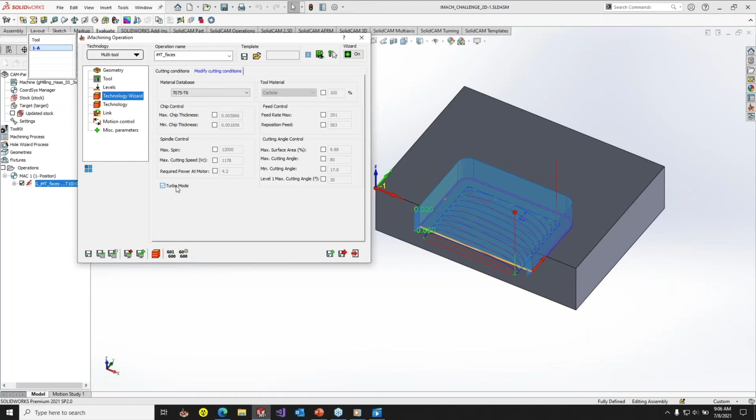And then the last thing that you may want to do is inside of the iMachining database, the one that you created, let's go to that 7075. You have a machinability factor. Basically, for some materials, the ultimate tensile strength is not the only thing that decides how machinable it is. Titanium is more abrasive to the tool, so it wears faster. So titanium would be less machinable than a similar material with that hardness. So machinability factor, if you want to go faster, you can say it's more machinable. So 50% will allow it to be more machinable.

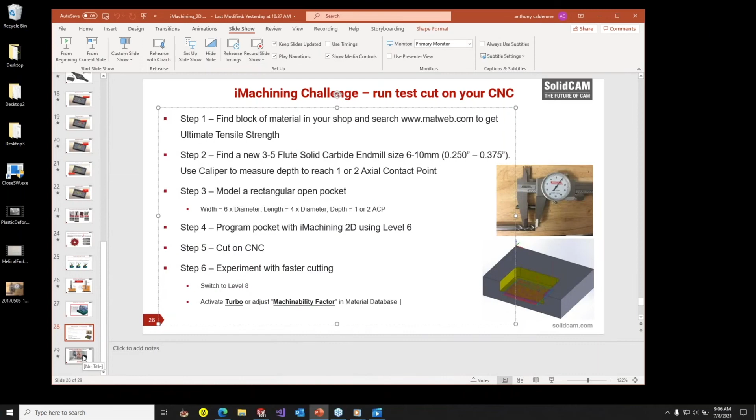So that ends my presentation on that. And the last thing I want to end with, because I think this says a lot, is this last video, and I'm going to switch back to the GoToMeeting to play this video.

Okay, so as Greg Burns said there, iMachining is his best competitive edge. It is the truth. As I said, it is like getting multiple CNCs for the price of one, and it truly will change the way you machine parts. Okay, I will switch back to my screen. And that concludes the presentation.